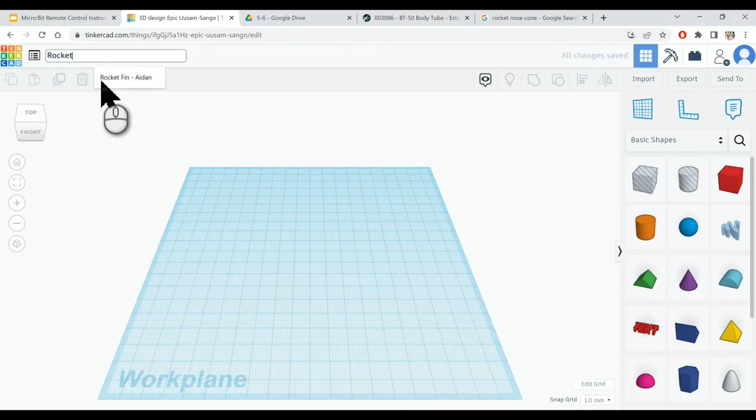Let's go ahead and name our file. So it's going to be a rocket nose cone, and then make sure to include your name so we can find it easily knowing it's your project.

First, let's look at what a nose cone should look like. So over here I have an image of one. First we want this little cylinder at the bottom, and then second will be the actual cone.

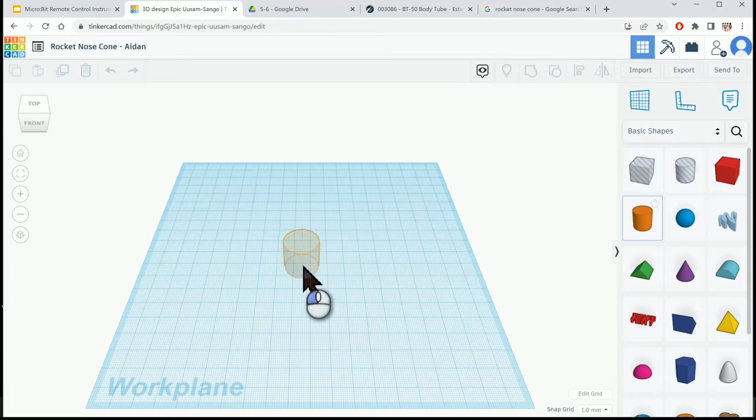So let's go ahead and bring in this orange cylinder into our model. I want to adjust the thickness of this so that it fits perfectly in the body tube of my rocket, so I'm going to look at the dimensions from the actual people that sell the rockets.

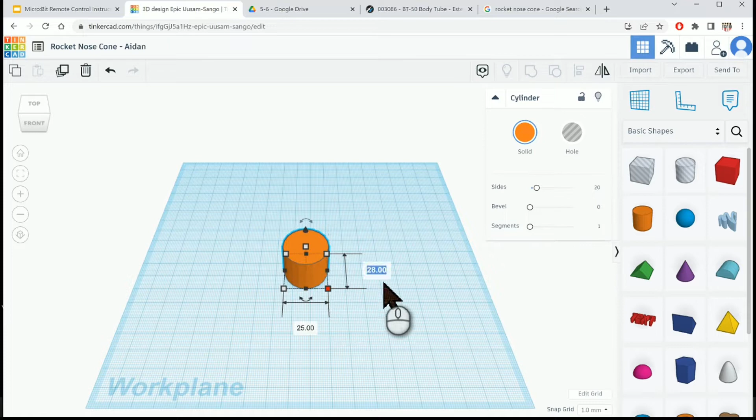So this is a BT50 body tube. If you go down to specifications, you can see that the inner diameter is 24.1 millimeters. So let's change the length and width of this cylinder to 24.1, tab, then 24.1, tab, and that should set that as a dimension. For height, let's make it an even 25 millimeters.

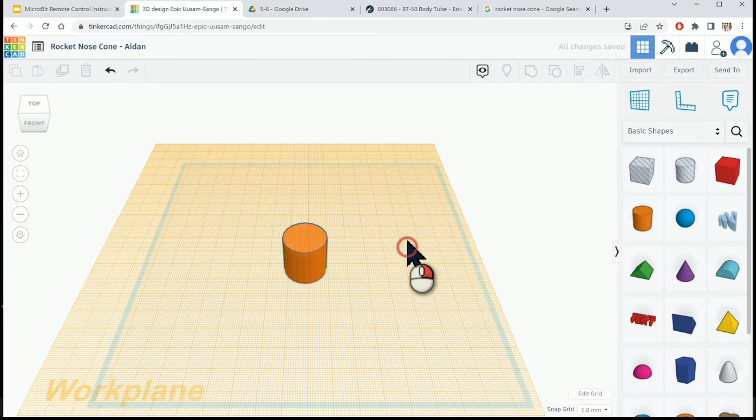So next we need to bring in our nose cone, but it needs to go on top of that cylinder. If you look, you can see it's above the cylinder. So the way we're going to do that is by adding a work plane. I'll click up here on the right and then click on top of my cylinder, and you can see it's created a plane to work with on top.

So I'll bring in this kind of pointy object. That'll be the cone that's going to go above it, but you can see it's a little bit bigger than the original, so let's go ahead and look at the specifications. The outside diameter should be 24.8 millimeters.

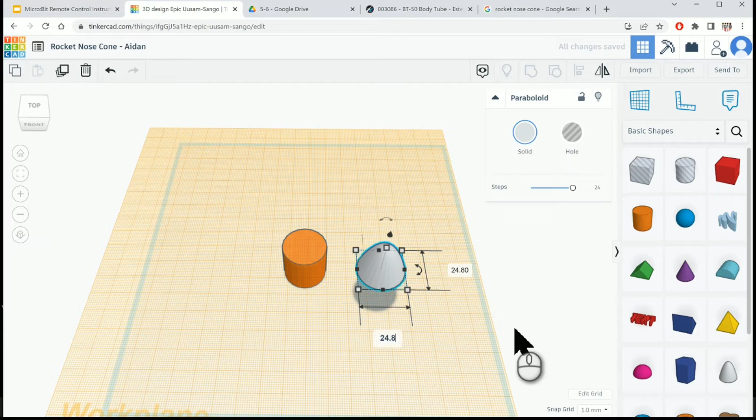So we'll go back into our model, and let's adjust that to be 24.8 by 24.8. 24.8, tab, 24.8. Now for the height, I want to adjust it to be about 3 inches, so about 25 millimeters times 3 is going to be 75. So 75, enter. But now there's a dilemma.

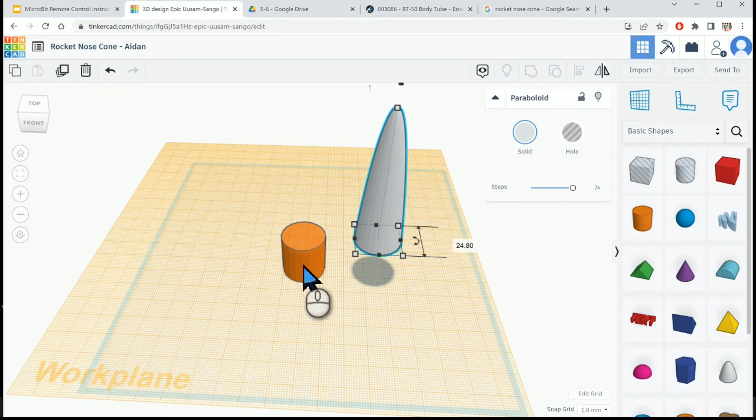I can adjust this, but I'll never be able to get it perfectly centered on that cylinder. So we're going to fix that by using this constraint tool. Let's select both our models by holding down Shift on our keyboard, then click both models, and this tool will highlight right here.

So we'll click Align. I want the white to align to the orange, so I'm going to click the orange object, and then align it to the center on the left, and the center right in front of me. That's going to adjust it perfectly centered on top of that object.

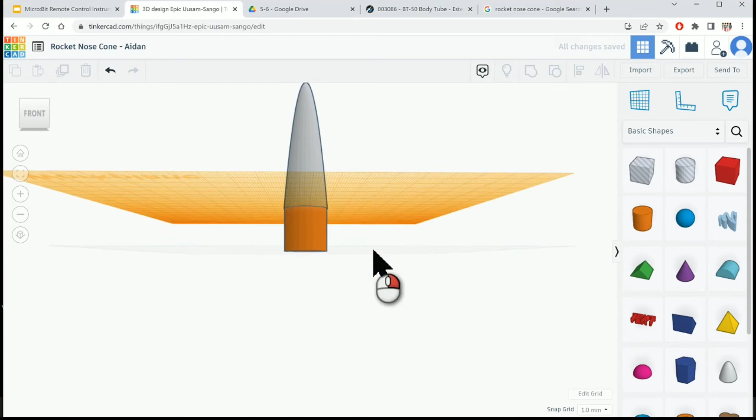So now if you orbit and pan underneath, you can zoom in and actually see there's that little lip, just like we saw in the example model, and that lip will catch on the edge of our body tube, so that way our nose cone doesn't slide inside the body tube.

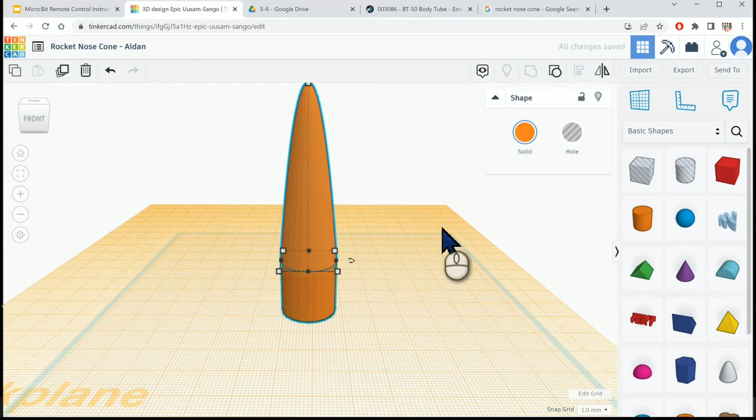There's still a little bit of a problem, and that's that these are two 3D models. So let's hold down Shift and select both 3D models, then use the Combine tool to combine them into a single 3D model. So it all turned orange. Now this is one 3D model.

Let's go ahead and export it to 3D print. We'll click Export. Now the file type for 3D printing is STL, so it downloaded nose cone STL. I'm going to click Show in Folder just to make sure I have the file in my folder.

Perfect. Let's go ahead and upload that to the same Google Drive folder. We'll click into the summer camp, into the correct grade, then click New over on the left, File upload, and hunt down the nose cone STL file. We'll click Open. Now a teacher can help you load that STL file into the 3D printing software, where we can slice it and then load it on a 3D printer.